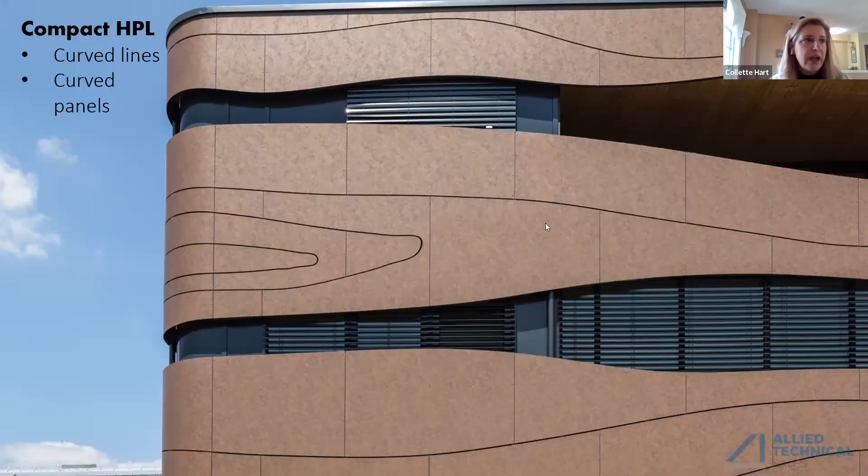We can not only cut curvy shapes into the panels, and the edges never need to be sealed or treated, so we've got nice round curvy lines on the face of the panel. As well, we can wrap the panel and bend it around some corners.

Soffits, everyone's got to close in these buildings. So the soffit area is a great place, and we have a system that creates a closed joint here as well, and you get the benefits of that compact HPL in terms of its durability, its flatness, and various textures.

Residential homes, also a great place. Most of us on this call, I'm assuming, are working in commercial applications, but if you've got some architects working in residential spaces, this is a great place as well.

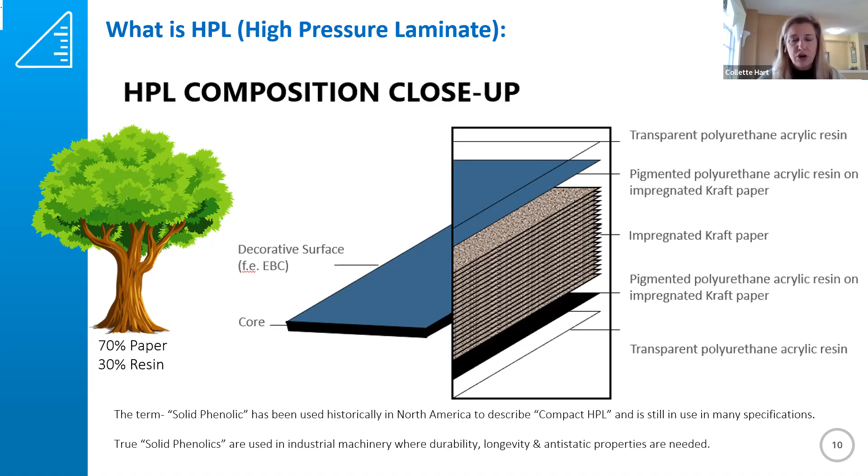Compact HPL is made up of 70% paper and 30% resin, making this a phenomenal carbon neutral and/or carbon positive product on your project. So all of the paper, it's basically Kraft paper rolled out in long strips, impregnated with a resin, and then compressed under high heat. Different manufacturers will have different processes and different decor surfaces.

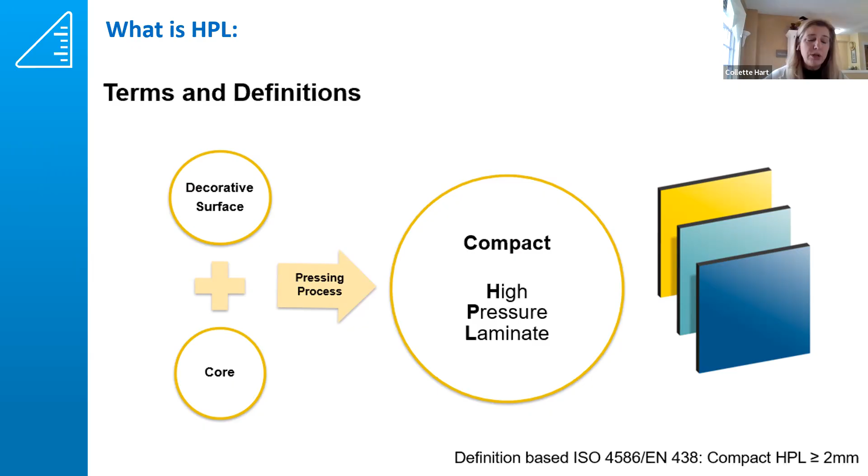Ideally, you're looking for a manufacturer that owns that entire process, both that they own their decor finishes, they're not buying those from a third party, and also that they own the pressing process, that they're not buying different pieces and laminating them together. You can then run into, as we all know, supply chain problems and color consistency problems.

There are multiple applications of HPL, of high pressure laminate. You might be like, I don't know where I've seen this before. Trust me, you have seen it. If you have been in a toilet in a public space, you have seen it as a toilet partition, perhaps as a wall lining in an institutional building. Sometimes some lockers are made out of it.

So in interior spaces, you've seen compact HPL as a countertop, as a wall lining. Laboratories and healthcare settings are great places due to the closed surface and easy cleanability. Today, we're going to focus on why and where it's great in exterior settings.

Here's a big hospital in Fort McMurray, Alberta, very high-end sort of Canadian space here. Large format panels, these were all custom colored as well, and a nice vibrant blues with multiple panel shapes.

This is the National Center for Civil and Human Rights. I have seen this, situated in Atlanta. Beautiful, and again, you're seeing some metallics, a little bit of a curved element, and this project has won many design awards, as we all like to be involved in the award-winning projects.

Touching on Rainscreen, many years ago, buildings were built with one material. That one material was both the inside and outside of our building. And those could be various materials, from snow to rock to straw bales.

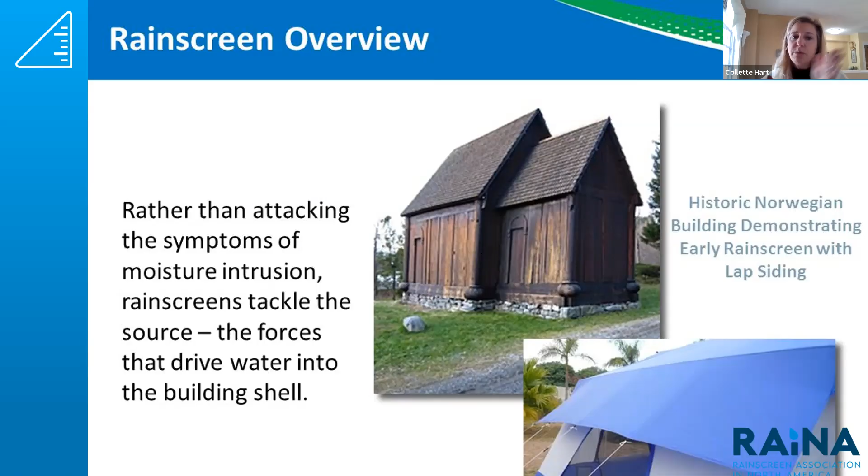The Norwegian barn builders were some of the first that we understand did this with their barns to keep their very expensive crops dry throughout the rainy season. So there was an interior wall, an airspace, and then an exterior cladding. And that's what we're going to talk about a little bit more in detail.

There are many, many pictures. I am not proposing to show you the only one, but the RAINA Association, please bookmark this name or go Google them.

The Rainscreen Association in North America is a newer association, and we are doing a lot to promote proper rain screens. One of the drawings that you will see is what we call the perfect wall.

Working from right to left in this diagram, you have the inside or your finished wall. That may be just painted drywall, or this could be compact HPL. You may have some interior insulation. Then you have a support wall, a vapor control layer, and a thermal control layer.

We've got an air control layer and a water control layer, so there are a lot of properties happening in this tiny space. Very often these are from different manufacturers, so different specs, different materials with different properties, and we all need these to operate in a harmonious way, ideally installed by one trade, or at least minimizing the number of trades that have to touch these spaces.

Then I want an unobstructed vertical airspace to create a nice chimney effect, and then I'm going to put a finish panel on here. This finish panel can be anything in the facade world: terracottas, fiber cements, aluminum or ACM panels, metal panels, premium metals, brick. Today we're going to talk about compact HPL going in this space.

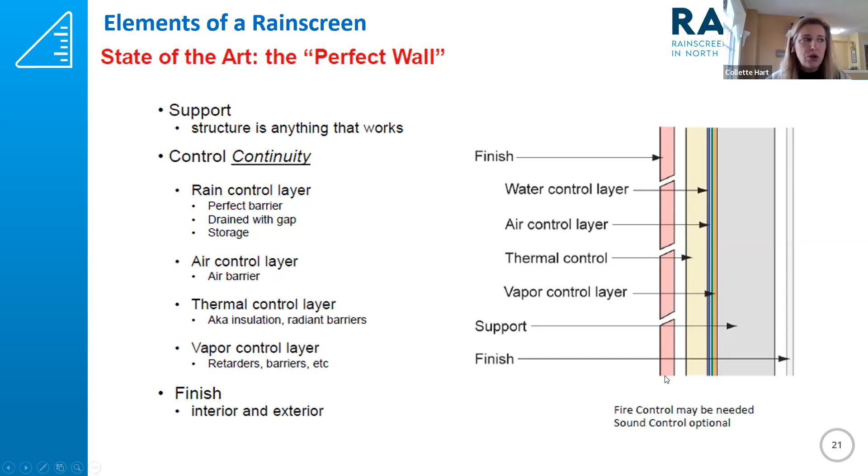What influences the attachment of your facade panel to your substructure? Well, that depends on the weight of your facade material. Compact HPL is around 2.2 pounds per square foot, putting it into the light or medium weight category, meaning your substructure doesn't need to be as robust as if you're hanging granite, which could also be a rainscreen product. So we won't need as many robust clips here.

It's going to depend on the cladding weight, the wind pressure in your zone, and the depth of the system. This is impacted by a few different factors: the attachment method for the facade product, how much insulation you require, and the strength of that substrate. Is this a reclad and maybe we need to beef up something, or is this new construction where we know the structural spacing we can work off of?

What's the backup wall construction type? And what are the thermal resilience goals or requirements we're trying to meet? Are you trying to meet ASHRAE 90.1? Is this Passive House or LEED certified? Do we have fire code regulations for NFPA 285? These are all very important things. Also, are you working in a seismic zone? We may need to tighten up the spacing in those cases.

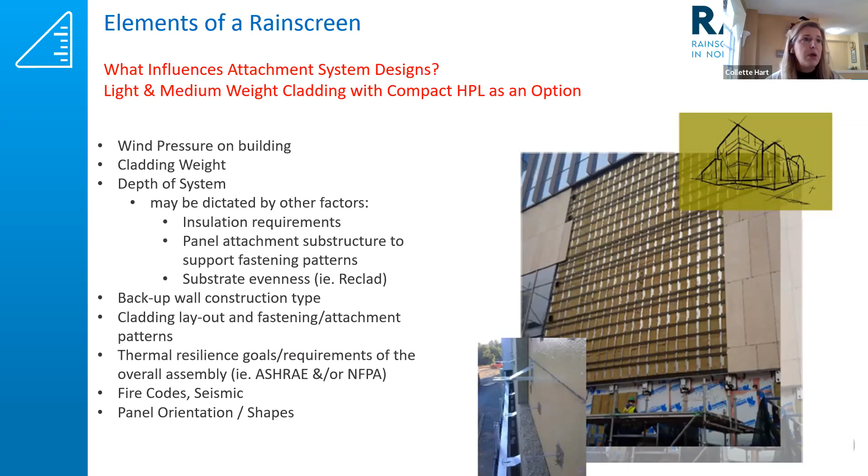So those are a lot of factors, and I'm going to try and address a few more of them, but that's what's going to impact how you attach the system onto your wall.

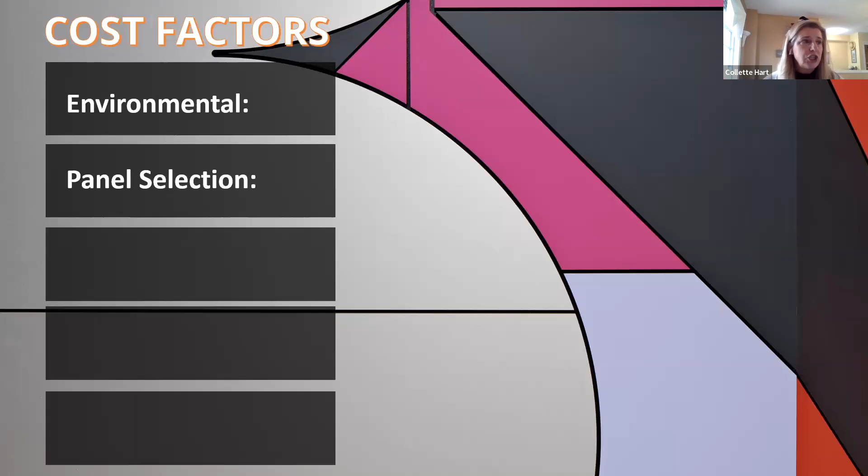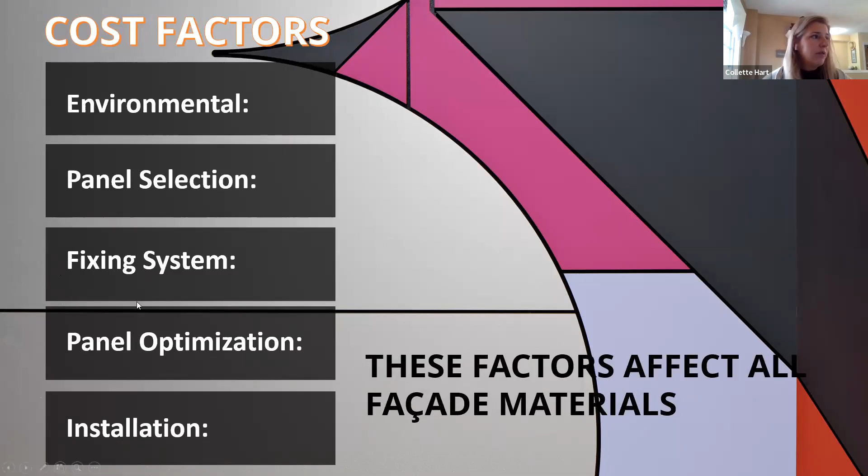Cost factors—here we go, getting into the money right away. We're going to touch on the environmental cost factors, panel selection cost factors, fixing systems, panel optimization, and then the install. These impact all facade products pretty much identically, so you're really just looking at what is my total budget for my wall, because these factors should be the same.

Sustainability, our environmental cost factors cannot be ignored any longer. I hope that we are all trying to build sustainably now, meaning we are building in a responsible manner so that buildings can withstand higher changes to our climate, in both high heat and cold temperatures, as well as severe weather incidents.

There's a documentary I encourage you to try and watch—it's a great one. Basically, one house was left standing in an entire community because it was built both sustainably and in order to withstand climate change.

Collette, we got one question pop up, on carbon, maybe you're getting to it here. I know a couple of folks were at the conference last week in Denver, and there was an educational session on carbon embodiment in materials and sustainability. Perfect timing for the question—right, I hit the slide.

Trees, while they're growing, remove carbon or CO2 from the environment. They store that as dry mass through photosynthesis. Compact HPL, the paper used in that production, the carbon remains captured in that wood, in that paper fiber, for its lifetime.

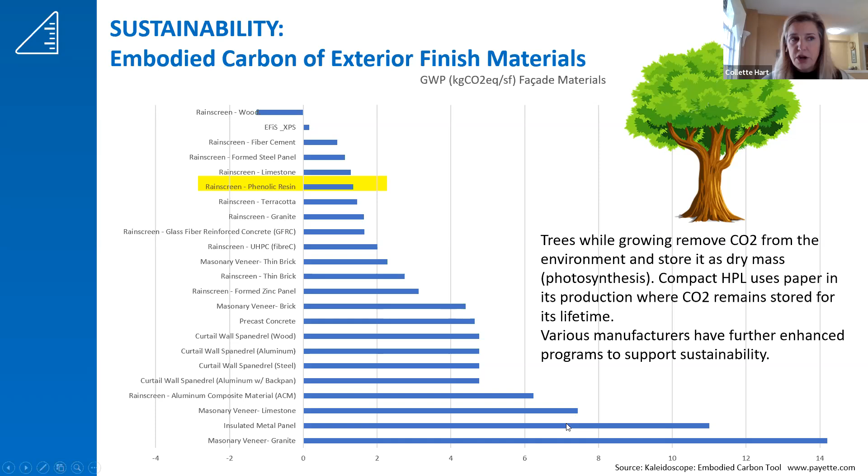I've tried to touch on it a little bit, and we'll maybe get a couple other points, but I really want to do another CEU way more on carbon and understanding it. There are lots of resources, but I hope I've directed you to Payette and their Kaleidoscope tool.

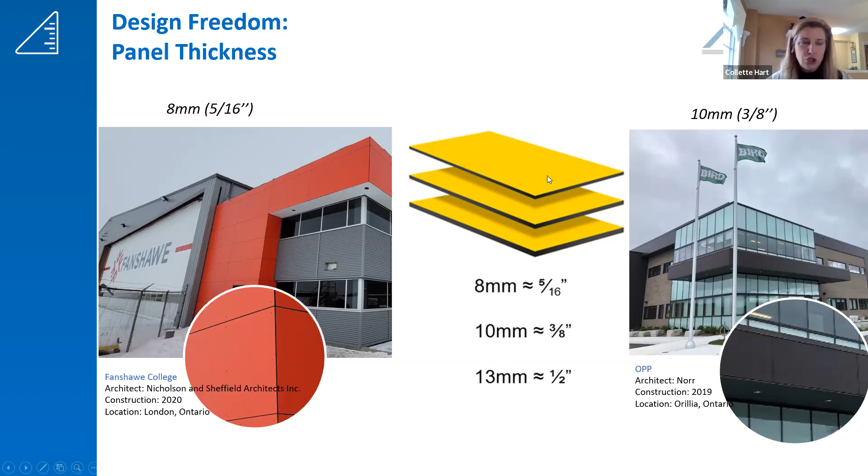And then 1/2 inch panel - these are extremely robust. I'd probably use these where I know I have extreme high impact scenarios, signage or fencing, various applications. Very rarely do we go into that. For 8 millimeters, I have 2 different attachment methods we'll touch on for that one.

Panel sizes - various manufacturers will have different panel sizes. This is really important to understand when architects and designers are doing their panel layout. Some manufacturers will just have one sheet size of a 4x8. Other manufacturers will have various sheet sizes, not only varying in width, but also varying in height, so you get a good mixture so that you can optimize your layout.

You may also want to work with a manufacturer that has no minimum orders. I represent one manufacturer where you can order one blue panel if you would like and one wood grain panel - I don't have to order a full skid of material for you just to do this small area. That is a huge asset when it comes to the sustainability of the building.

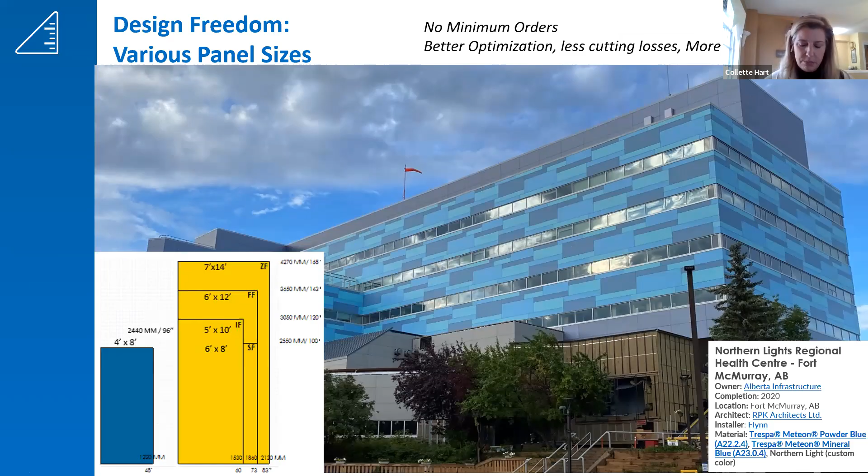So we went from a 6x12, which had a large amount of waste, down to using 6x8 sheets to get this great optimization. Was that clear for people in terms of how we take these various sheet sizes and say, on your crazy layout or on your very simple layout, let's work with the best sheet sizes or a mix of sheet sizes to get the least amount of waste. The least amount of waste is the true cost factor for all of us.

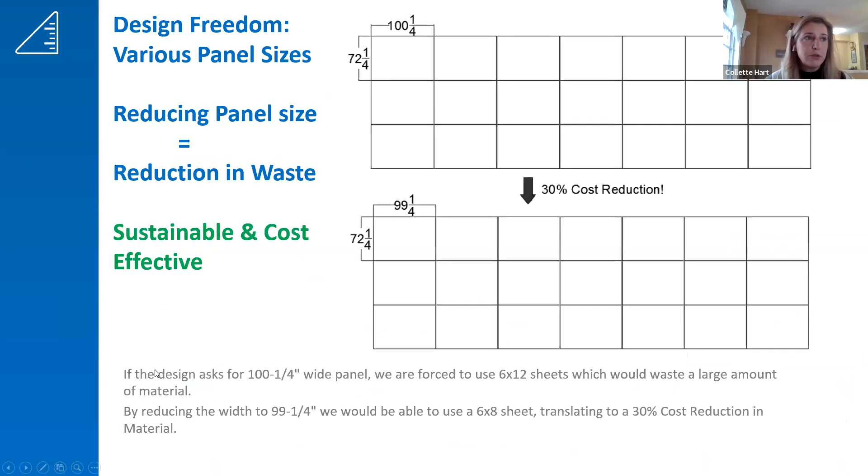Reuse - so on your layout, perhaps we have a small offcut. Well, where can we use that elsewhere on the building? So we want to take a panel optimization and move that around.

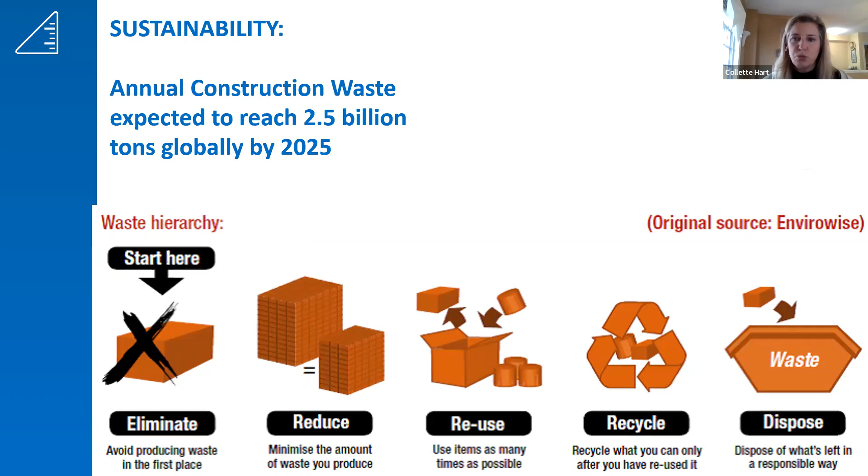Is the material recyclable? Unfortunately, compact HPL is not recyclable in North America. However, the product is so strong and stable that you can take it off of the building - we've had clients build it into benches or swings at schoolyards. And then dispose of what's left in a responsible way.

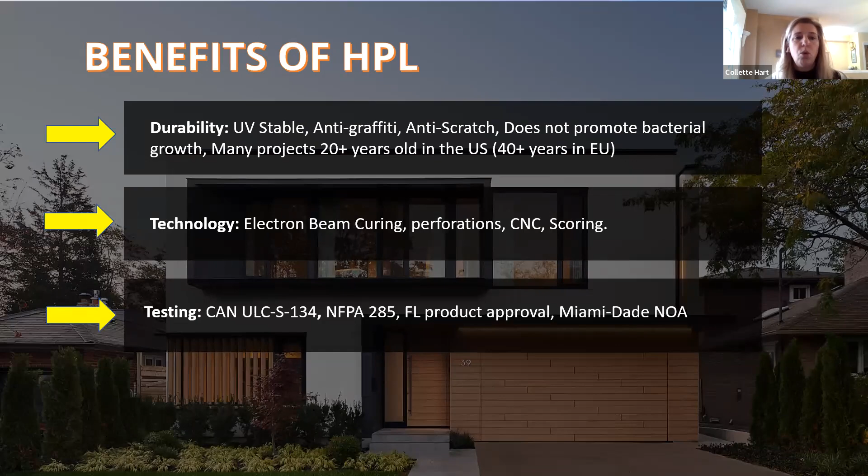Some of the benefits of HPL I'm going to touch on in the next few slides. So why do I think this is an awesome product to use? One is the technology - there is a technology called electron beam curing. We can go into this deeply. It basically closes the top surface layer of the panel.

This is a specifiable difference. So Mr. and Mrs. Spec writers on the calls, please encourage your clients, if they're looking at compact HPL, that they want something that has electron beam curing in that spec, because that closes that top surface layer. How is that going to benefit you? No dirt gets into that surface. No dirt means it stays clean, it lasts a long time.

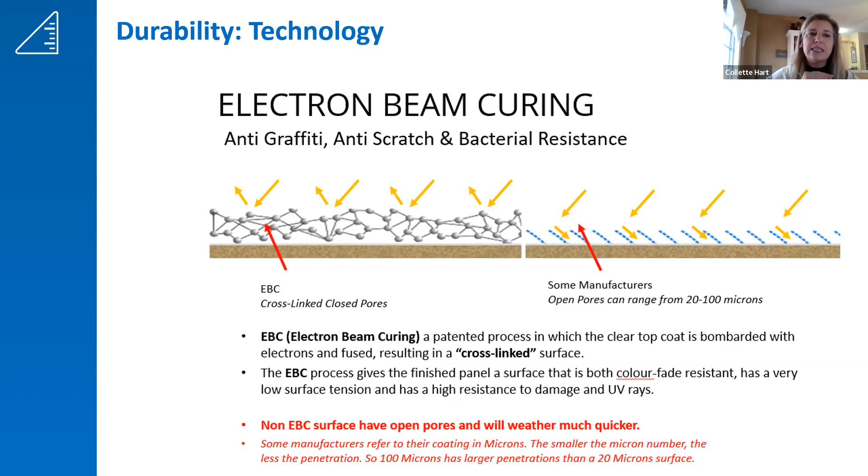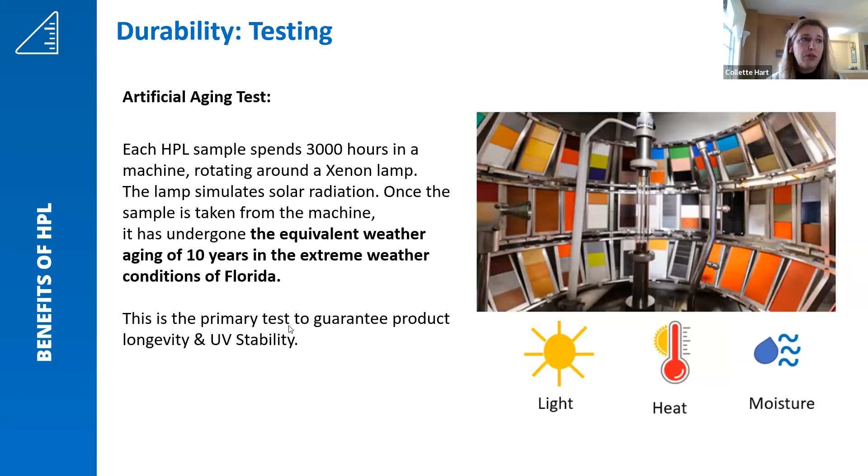Also, artificial weathering testing - look at not only the material data sheet, but look at your manufacturer's warranties to see what they will warranty. I'm hoping that you're working with a manufacturer that's going to warranty the color fade to the highest standard, and that may be above and beyond the test standard. Maybe they're going to go with a Florida test cycle.

Collette? Yeah, got a question. Actually, my question is on the warranty.

Last week at the conference, I sat through a warranty presentation on roofing, and I learned more than a few things I really didn't realize about a roof warranty. But in relation to once the material's installed and the facility is under operation, what kind of preventive or ongoing facility maintenance is required, or what depth, if any, is required to help maintain the warranty? I know sometimes with roofs there are certain things you have to do at certain intervals, and if you don't do it, or can't provide proof that you did it, they get kind of stingy about whether something's covered under warranty or not if there's an issue.

Yeah, so I'm going to take the liberty, because I love questions, to skip down a section of the presentation. I put this slide in today for you, Mark, because I think it's a really important topic. At the beginning, I touched on how compact HPL does not require any sealants or treatments when you cut the edge of the panel. Basically, we leave it raw. Because no additional sealant or treatment is required, you don't need to maintain these panels. Compact HPL, one particular manufacturer, has a standard 10-year warranty that requires zero maintenance. No maintenance is required to ensure that 10-year warranty.

The other important factor to look at with warranties is where that warranty is adjudicated. If the product is made internationally, sometimes the manufacturer holds that warranty in Spain or the Netherlands, and adjudicating that warranty gets very tricky. I represent a product where the warranty is held in North America by us, so that means you're really dealing with North American and US law. That's very important when you're trying to make a warranty claim, and I really encourage people to look at that.

We've just created this slide, so I'd love anyone's feedback. Let me explain it: the blue bar right now—pardon me, the slide does have a manufacturer's name on here, Trespa. This is compact HPL with two colors. We were preparing a slide for a client right now; they're trying to figure out the cost of ownership for this material over a 10-year life cycle. So the blue line shows both their compact HPL in a red and a wood grain finish.

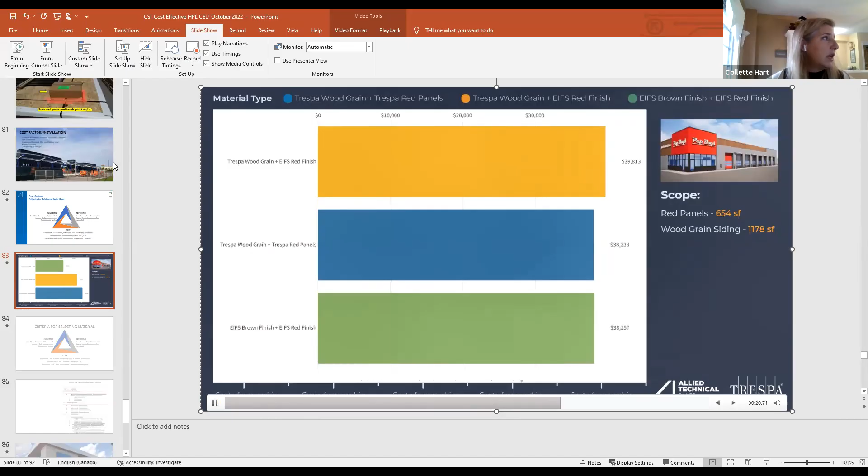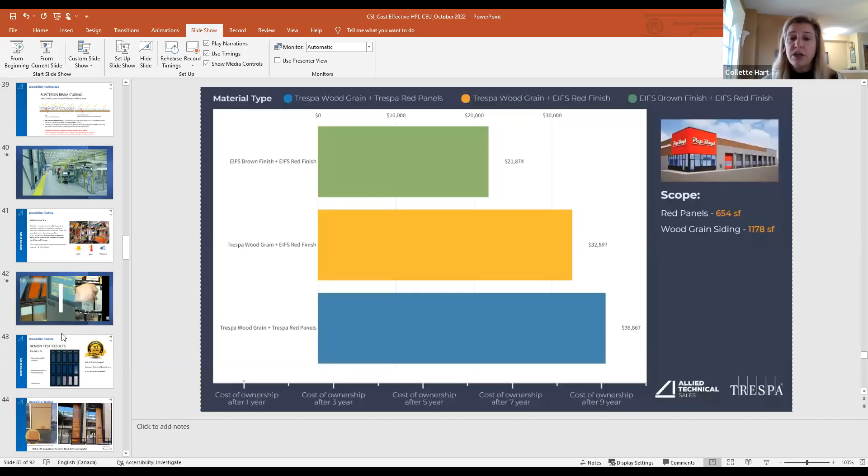We did do an entire presentation, and we built it a while ago, on the cost of ownership. And that's exactly the point—what does it cost to maintain this material? I have to honestly say, Compact HPL, once you put it up, zero maintenance is required. And honestly, if it gets dirty, you just clean it with whatever you'd like. There are no special cleaners required.

Little video—oh, I don't have the audio, but this is an artificial weathering test, saltwater spray, Xenon arc lamp.

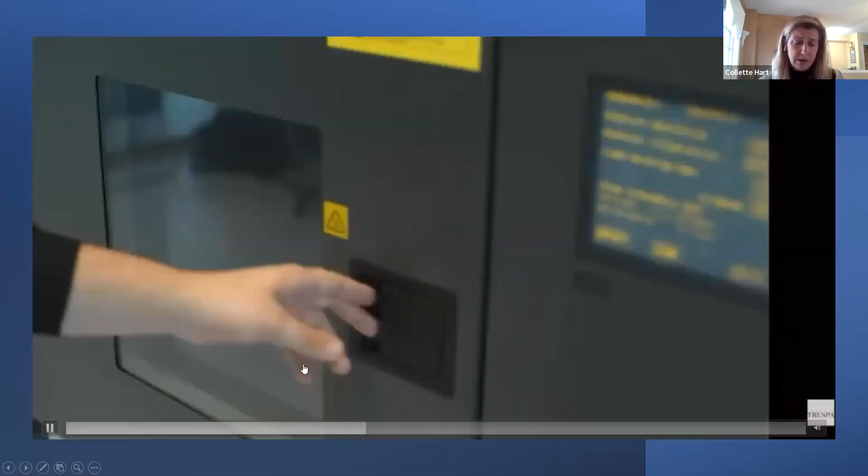They put all the colors in here. Any new colors that are developed are also tested to these same rigorous standards.

This is a panel with the decorative or the EBC, electron beam cured panels, at 0 hours and 3,000 hours — zero fade, no change to the material. So you've got this great 10-year warranty.

A melamine surface is a great material, but not for an exterior application. So please double check what type of surface layer is on there. After only 500 hours, it's got fade, white spotting, and weathering.

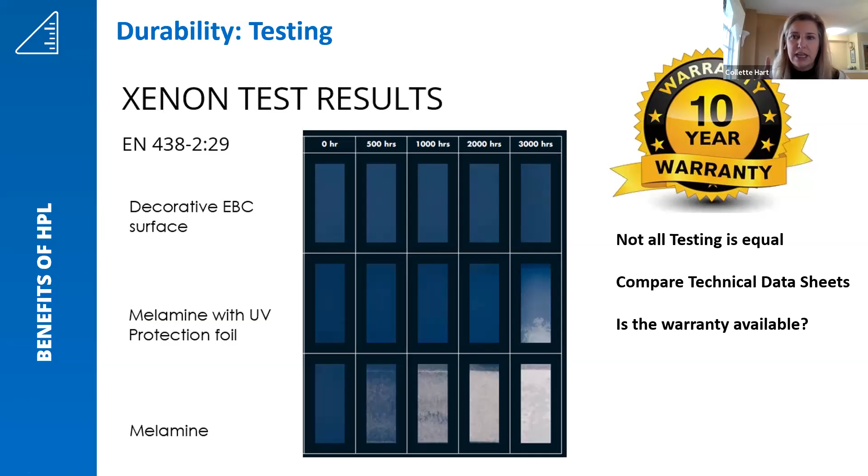Compare your data sheet, but more importantly, compare the warranties and what is required. Some manufacturers may not even share their warranty with you until you buy the product. That's my number one red flag. If they won't share the warranty with you now, they're not confident in it.

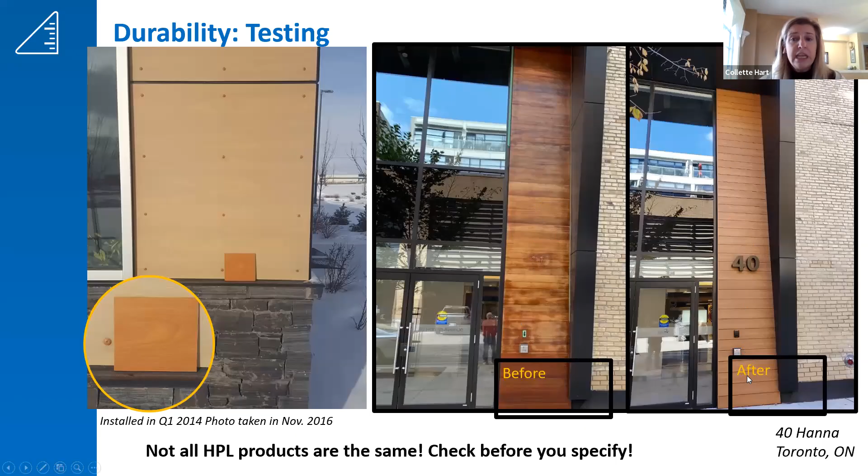On this other project, the client specified Compact HPL, but the installer value-engineered it and put real wood up instead. Within 2 years, that real wood had faded out. It would have required owner maintenance to constantly go back, reseal, and treat it. They said, I don't want to be sealing and treating that — please go put up the Compact HPL like we asked, and it will look like this and maintain that. This product is installed in all harsh climates, from high Arctic to Southern California.

The other neat thing about Compact HPL, we often don't consider when we're working on projects: is this building going to expand or grow? Are they going to put an addition on it? This police station in Rotterdam did exactly that.

After 23 years, they needed to put another small addition on. They wanted the exact same red colored panel. They could achieve that with this Compact HPL because the color has not changed in its formulation or its warranty. So brand new panels look exactly the same.

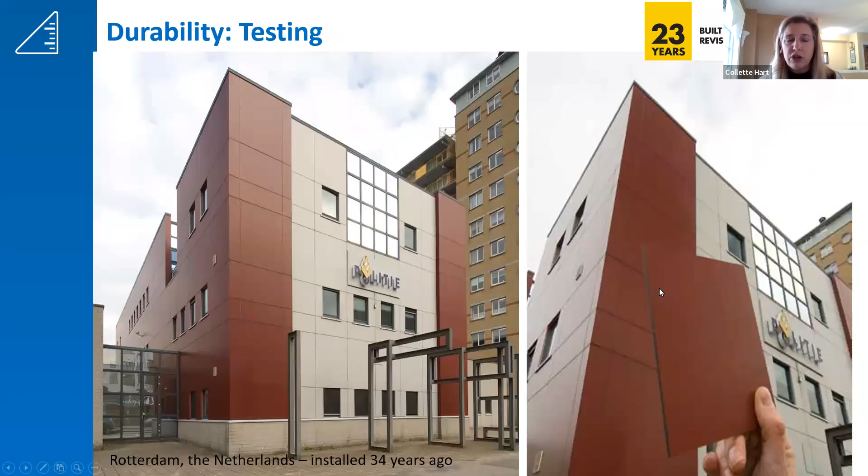You're like, okay, that's great if you're doing an addition on a building. But what about if you build a small project and somebody drives into the building? It happens more than I can say as a manufacturer. We've built this beautiful facade, it goes up, but a few panels are damaged here.

Replacement panels — again, you only need to order one panel from us. You don't need to keep attic stock anywhere because my dye lots are going to be exactly the same. It won't be different from batch to batch. So you can replace this one panel where, let's call this, a fatigued person drove right into the building. You can replace these panels quickly and efficiently and have the same color there. That's why it's important to choose a product that doesn't fade or change.

Going back into cost factors to the environment, carbon — I also want you to build straight buildings.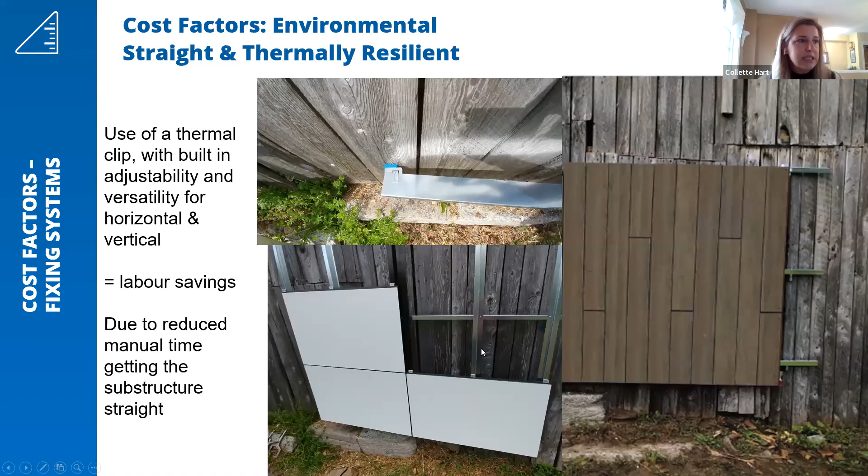Then you're going to fill this cavity with insulation to improve that. You're going to save labor here, and labor is also where the money is at. So here's a simple detail to get a straight and thermally effective install with both large panels and small planks in various ways.

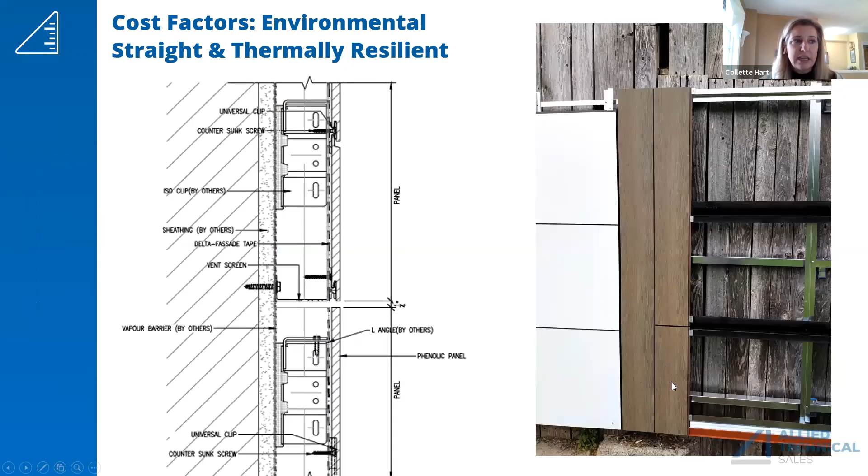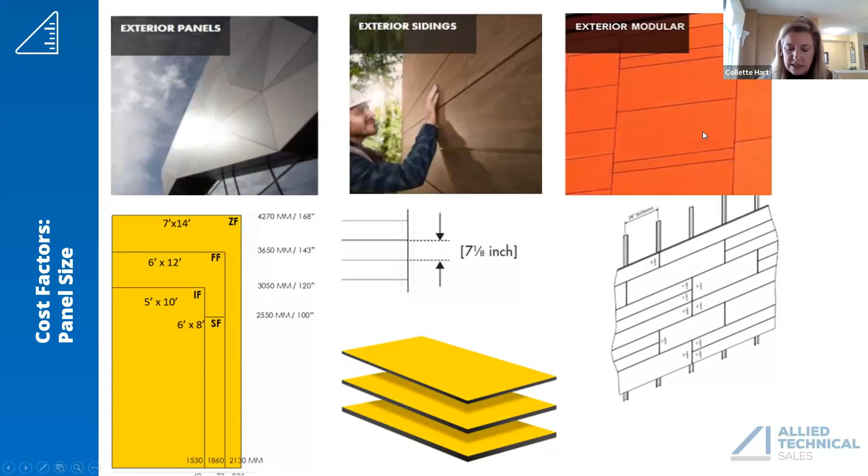Okay, exterior panels, getting a bit more into the cost factors. Big panels typically cost a little bit more sometimes, depending on the thickness of the panels, but then it's going to be the attachment method. Plank systems are the new cost-effective way to do this — so this is getting into our fixing systems.

Now that you've selected your rainbow bright colors, what you want to work with, I'm going to go over 3 different attachment methods here. This is taking my thinnest panel, an 8mm or 5/16 of an inch panel — the one where I said we sell probably 90% of our stock. I'm going to show you a system using it on an adjustable and thermally broken clip system with galvanized, both horizontal and vertical bars.

You could get the same aesthetic look of large panels, face fastened with color matched screws, by using galvanized or wood battens. Wood battens would primarily be on residential, but some commercial buildings or people trying to get more sustainable may look at wood too. Then there's the traditional European way many people saw, aluminum channels, or if you're in a very high salt concentration area, we might have to consider aluminum.

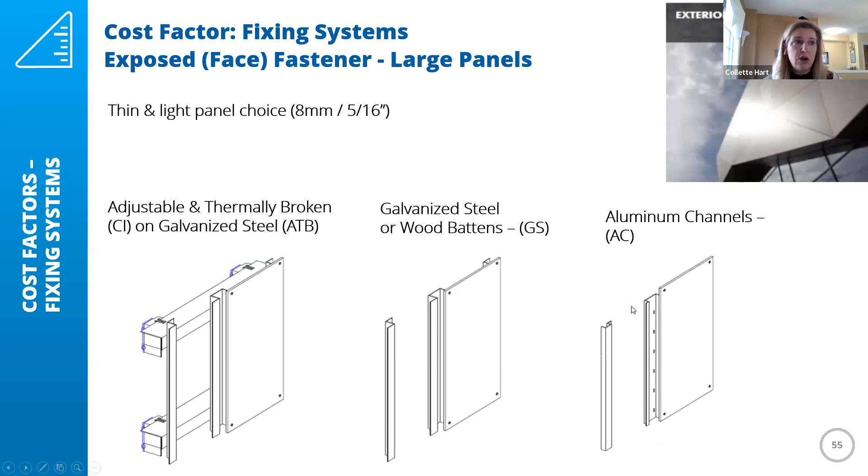Aluminum is very expensive. So let's look at some pricing comparisons. This is my chart, my panel cost factor. Let's use $1 per square foot. That's not exactly how it works, but for simple math today, we're going to use $1 per square foot. The panel is the same across all of these.

Adjustable and thermally broken is my first system here. My system cost factor, with all the subcomponents, is a little expensive, at $1.05 per square foot. My install cost, don't forget the labor that has to go into this, is 0.75. Quickly scanning across the chart, this is the lowest labor rate because it's so fast to put these clips up on the wall, for a total installed cost factor of 0.85. An aluminum system, on my bottom right, is at a cost factor of 1.0.

So if we added all this up, I'd be at $3 per square foot here. I'd be at $2.85 here. I am saving money just by going with the superior adjustable thermally broken system. But guess what? I'm also getting the super bonus of meeting new energy efficiency codes, and I am fire code compliant for NFPA 285.

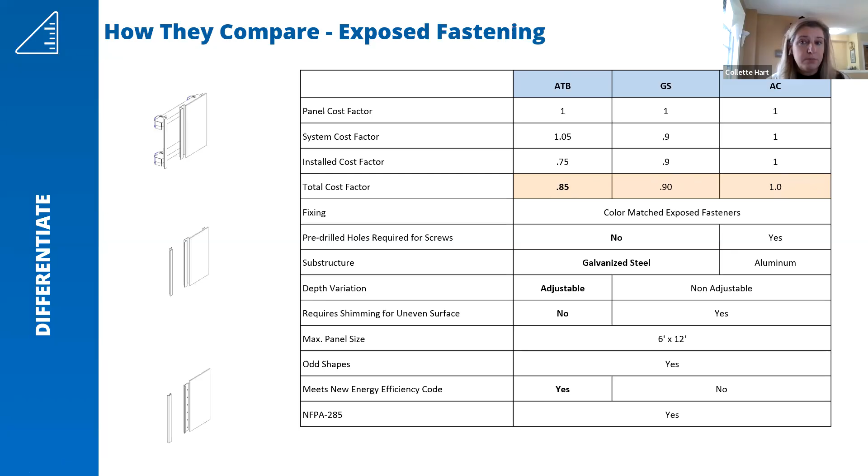Huge factors. Okay, the next system, some of your architects may say, no, I do not want to see those screws at all, I want a mechanically concealed fastener. As I said at the beginning, this is now 10mm thick, so my panel is thicker, and that's more expensive right there. Then we have to use aluminum clips and rails on the back of the panel. These aluminum parts have to be extruded. There's no cheaper way to get those.

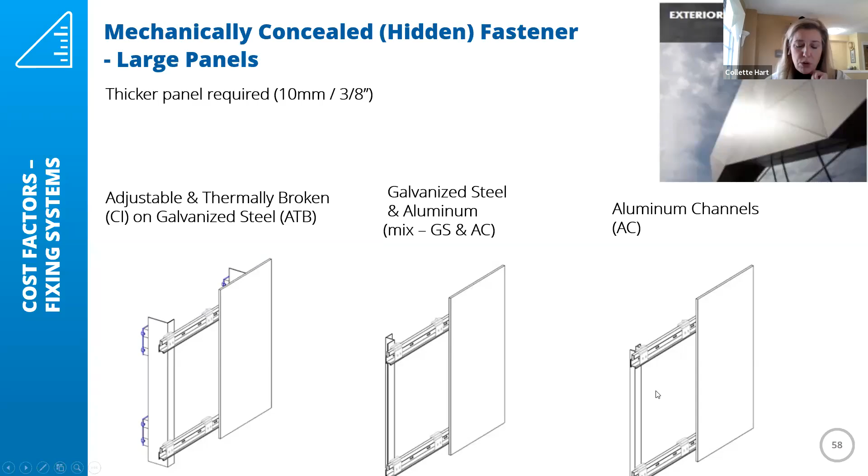Then I can go back to our galvanized clips and verticals. This is a mix of galvanized steel and aluminum channels, or I could use both aluminum. Yes, you can achieve some really cool looks, no visible fasteners, but I hope your client has a big budget for this one, because my panel cost has gone up by 20%.

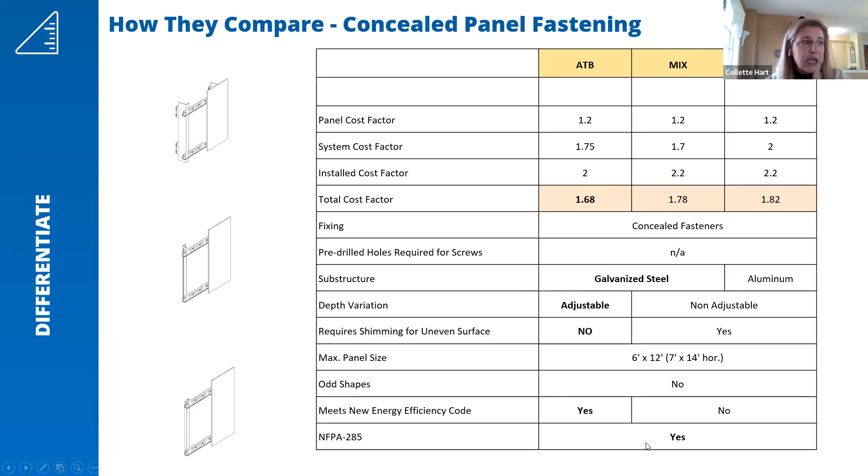System cost factor is again going to be high here. With my adjustable thermally broken clip, my install cost factor stays the lowest, so I'm getting a total cost factor that's less on the wall by using an adjustable and thermally broken clip system. You also get the great benefit of meeting your energy codes and staying NFPA 285 compliant.

The last system I'll show you goes back to using a thin 5/16 or 8mm panel that's been fabricated as a tongue and groove system. This notches together with a much smaller mechanical clip. We're still fastening this with a mechanical fastener, not using an adhesive. It could be simply installed on wood strapping, a small clip, and then the panel is fastened in here.

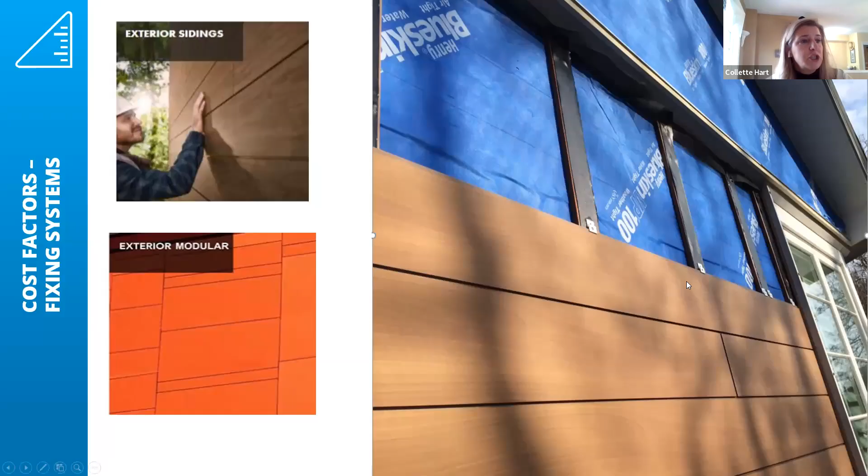You're getting long lengths and runs, and you're getting the benefit of a closed joint here, whereas with the other type of system this is an open joint between the panels, unless we add an additional joint closure, which would further increase the price. I should add that into my presentation. So this gives the benefit of a closed joint and a thinner panel.

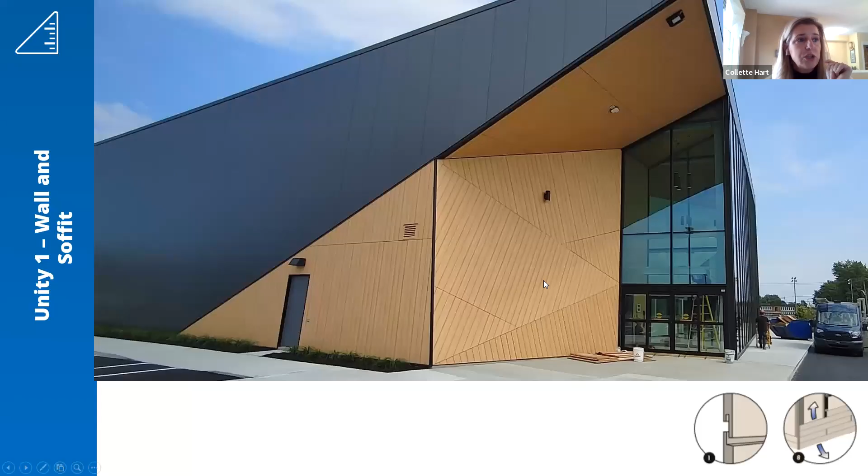Watch what happens to our pricing strategy here. This is an example of the building. We've installed both these vertical panels that are about 2 feet wide, very long length, up to 12 feet. I can also do small panels in that same plank application, so you're getting a multi-height plank system installed in the same manner. You can install it both vertically and horizontally.

Understanding this, your panel cost factor is pretty much the same. If we've got very small planks, it may go up a little bit.

Have I got a question coming in? Yeah, Collette, on installation, is there a manufacturer training program or certification program that folks who are going to be installing this could go be trained on the install?

Different manufacturers will require a trained installer, and this ties back to the warranty. That can be something specified as well, that you have to have completed the manufacturer's training course. At my company, I have two full-time trainers on staff who can do virtual or in-person training. Because of COVID, we got very good at virtual training sessions. They travel around North America doing installer training, or go to site for large projects. Also, the Rainscreen Association in North America is trying to come up with standardized testing for everyone doing rainscreen, because there are fundamental facts we want everyone doing the same way, like understanding you need a vertical airspace behind the panels to let them move and be ventilated. So through RAINA there are upcoming training courses, and different manufacturers may require that as a warranty condition.

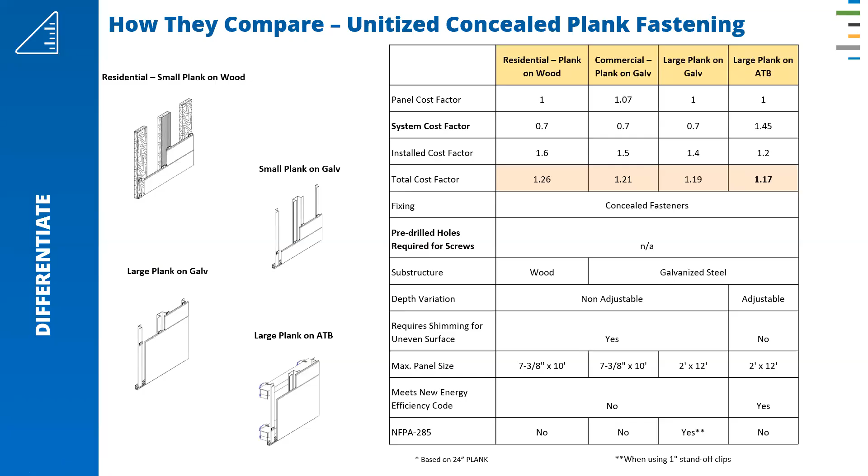Great point. Now, if you're doing a LEED or certified facility, say with enhanced commissioning, is there any specific commissioning requirement involved with the building envelope or enclosure testing? I know that's state to state, locale to locale, what's required.

I've been involved with those, Mark, when they've been part of a weather testing system combined with the curtain wall prior to install. They'll do a weather test on the entire assembly, like on the University of British Columbia project shown earlier, where the entire wall was installed in a unitized method with weather testing performed prior to assembly. I'm not aware that compact HPL, or any manufacturer I know of, has that as a requirement for install. Different products on the market may require it, but I'm not aware of any commissioning needed. Once the product is up, it doesn't move, it doesn't do anything. It's pretty inert.

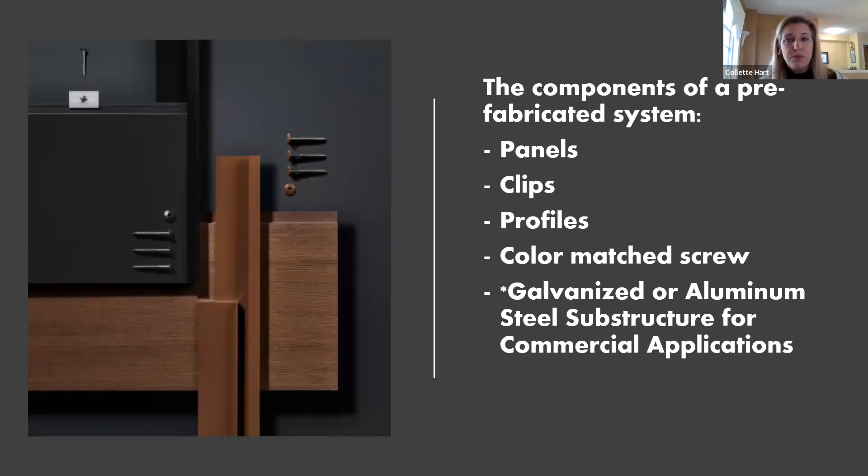So understanding this plank system, our panel cost factor is pretty consistent, but the system cost factor goes really low, it's our lowest cost factor because it's just that little aluminum clip, and the cost to install it is much less. So we get a total cost factor of 1.26 for a mechanically concealed fixed, closed joint, long linear plank look, versus 1.68 for the other system. So you're getting a very comparable look at a lower cost. You can get various plank heights, maybe not as large as some mechanical systems, so we need to look at plank height, and you may not always meet the energy codes, so we have to watch that depending on the building. For NFPA 285, I can now change this to yes, this plank system does meet NFPA 285 fire code for large planks with a galvanized steel substrate.

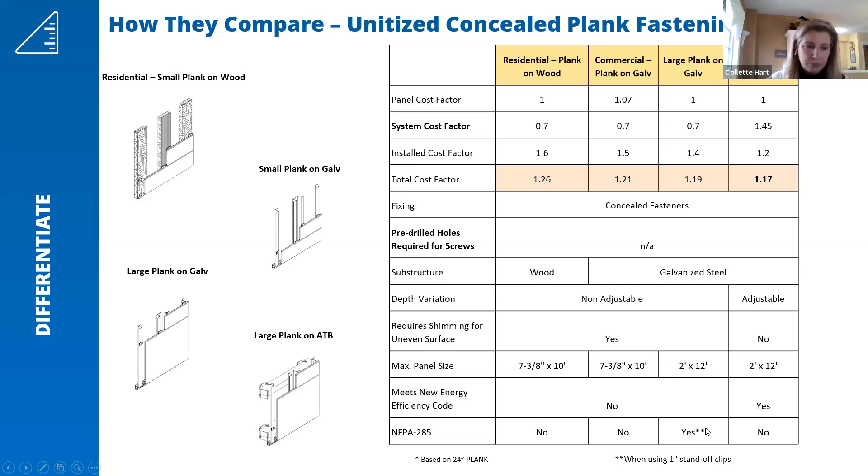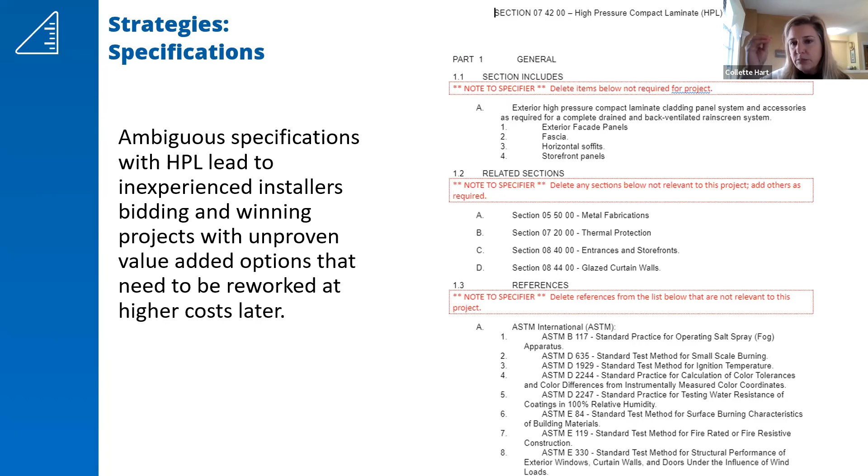Specifiers, before I lose your attention with 15 minutes to go, please reach out to myself or visit our website, there are specs you can download. I've tried to make it as easy as possible for you. I'm happy to receive your specs back and help highlight or make suggestions in terms of warranty, performance-based criteria, panel sizing, and install methods. Let's try to get the right system specified up front so we don't have to rework it during the bidding process. This is a project I like to do a quick case study on.

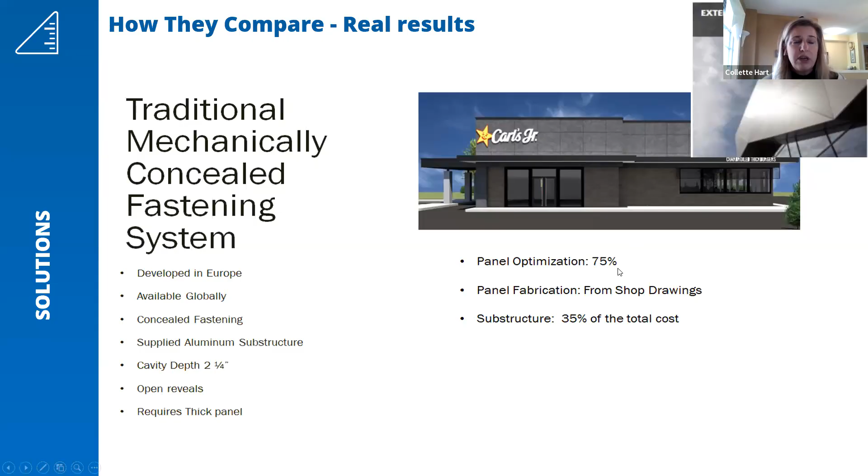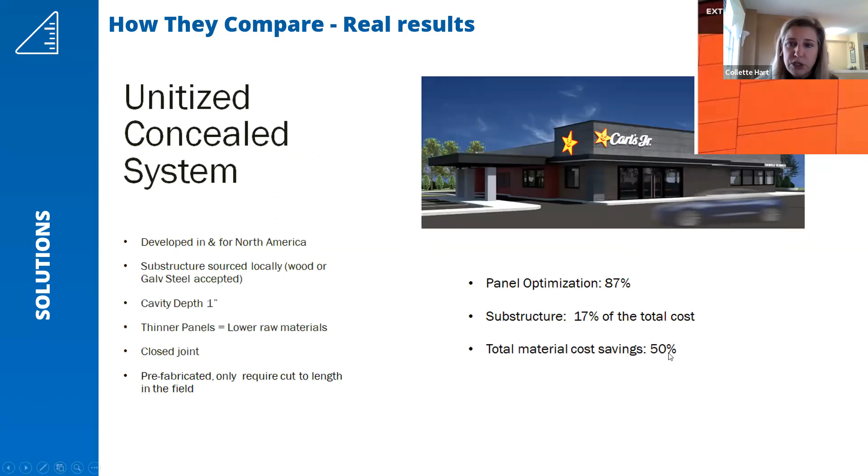The architect originally designed it with big rectangles using mechanically concealed fasteners. We re-optimized the building for more of a long linear plank look. Going through the cost factors quickly: the original aluminum substructure system had panel optimization at 75%, meaning 25% of panels went in the garbage. With the new optimization, we got panel optimization up to 87%, a far better use of panels. For total material, both substructure and panels, that's a cost savings of 50%. Adding in 50% faster labor, we gave the ownership a great install. A couple last points: corners and trims, something that's sometimes overlooked.

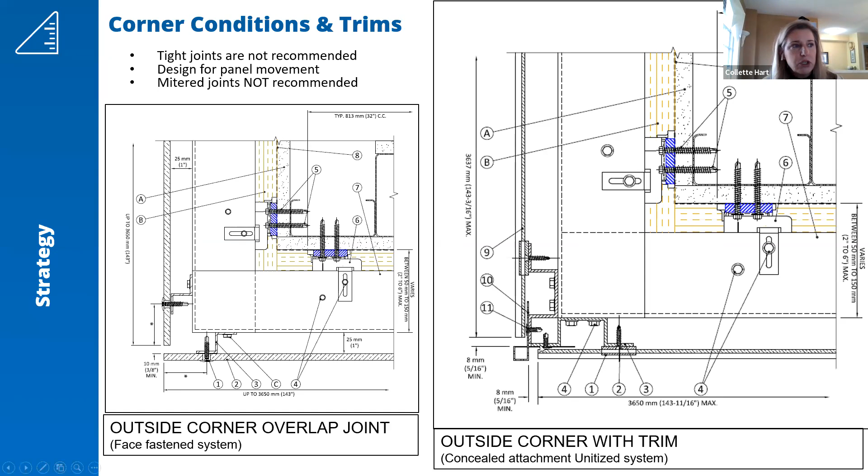This system, Compact HPL, does not require corners, but sometimes in a high impact area you may want this, so we can detail it as an open joint system. But if you're concerned, maybe at a bank, a walkway, or a school corner, you might want a little bit of protection. There are various ways to do this with corners.

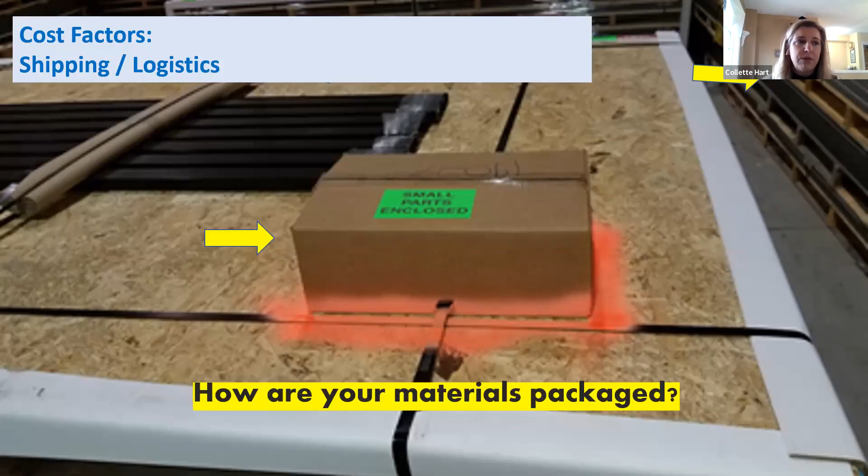Also, your shop fabrication - if we can fabricate most of it in the shop, we're going to save field labor. Also, how is it getting shipped to site, and is it protected? Make sure your manufacturer sends you all your screws and clips at the same time. So you want to work with a fabricator that understands your shipping and logistics. Cost factor - who's absorbing and figuring that out?

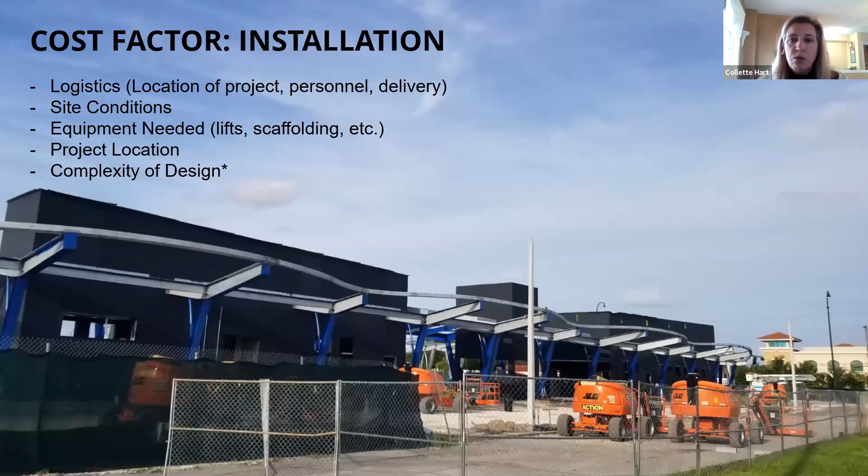People call me all the time and they're like, Collette, how much is this project going to cost? And I was like, where in the world is it? Is it hanging off a cliff in the Maritimes? Is it in a seismic area, hot, cold, downtown city? So, helping to understand your full project scope and who's carrying what for the equipment and labor.

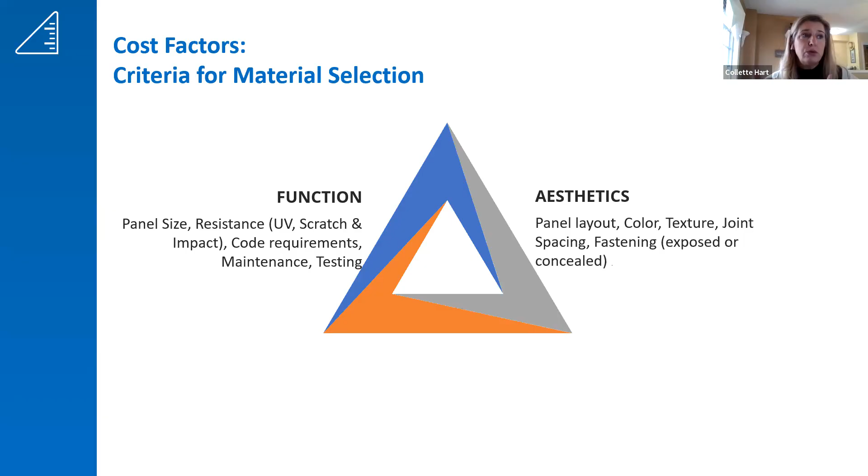Then when you're selecting a material, the aesthetics. Maybe you want a wood grain look or you want a metallic look. What do you want it to look like? Do you want long linear planks? Do you want it open joint, closed joint? What's the fastener spacing going to look like?

And then the cost - here we go, the big thing that we talked about. What is the cost to acquire your material? That's also your material, fabrication costs, and labor to install it. What's your environmental cost? Let's get smarter about this. What is the environmental cost, both the embodied carbon, the life cycle assessment of the product, and also do you have to maintain it or throw it in the garbage in 5 years because it's a throwaway product?

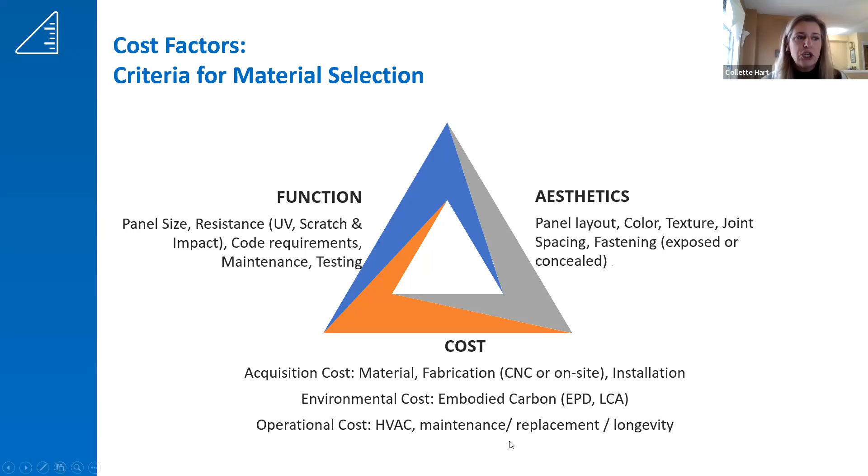And then what's your operational cost? As Mark touched on, do I need to do anything to replace or maintain this product? Okay, I did show this chart. I'm going to try and leave you guys with 10 minutes left if we can.

Quick strategy - how can you help your architects, designers, and ownership groups? Well, what's the color? There could be differences based on color and finish. What's the thickness of the panel? Maybe we can thin it out and go to a 5/16 versus a thicker panel. And what's the finish? Do you want a shiny metallic or a more matte look? There could be some price differences there.

Is fire code a requirement that can increase the cost factor? So if you don't need to meet NFPA 285, I can maybe make some changes to the system. Work with a supplier who's going to minimize the waste - don't ship extra panels across the oceans if you don't have to, and also don't throw extra material in the garbage. Maybe we can create renderings or do a panel optimization for you as part of the design process, and then work with someone who understands the labor costs as well.

That's it. I hopefully explained to you today what is Compact HPL, a high pressure laminate. We learned a little bit more about Rainscreen. We touched on a lot of cost factors, and now you've got some strategies to take to your ownership group. I can send you also this summary sheet at the end, which goes over a couple of the terms. That's it, I'm done.